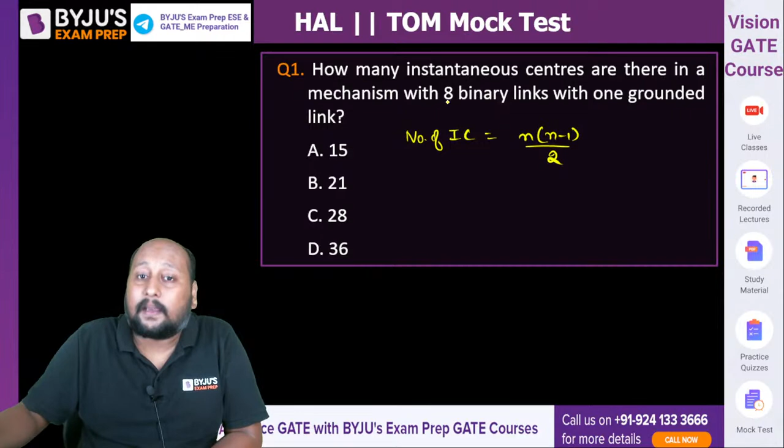But let us suppose, they are saying that in a mechanism there are 8 binary links with one grounded. So total number of links is 9. We have 8 binary links and 1 additional grounded link. So total number of links is 9. So it will be 9 into 8 by 2, that is 36. Option D is the correct answer. Read the statement carefully. Question को ध्यान से पढ़िए. If you commit a very small minor mistake, the wrong option will be there. और ये होता है in any PSU examination because time is very crucial. Less time पे you have to cover a lot of questions. Okay. चलिए. Can we proceed to the next one?

Question number 2 on the screen. A footstep bearing and a rotor of a vertical turbine form an example of incompletely constrained motion, partially constrained motion, completely constrained motion, or successfully constrained motion. What do you feel will be the correct answer? A, B, C or D? Footstep bearing, remember, if you have studied relative motion in theory of machines, we discussed this concept. In a footstep bearing or rotor, what is the type of constrained motion? Incompletely, partially, completely or successfully constrained? We are getting some responses. It's quite easy. Very good.

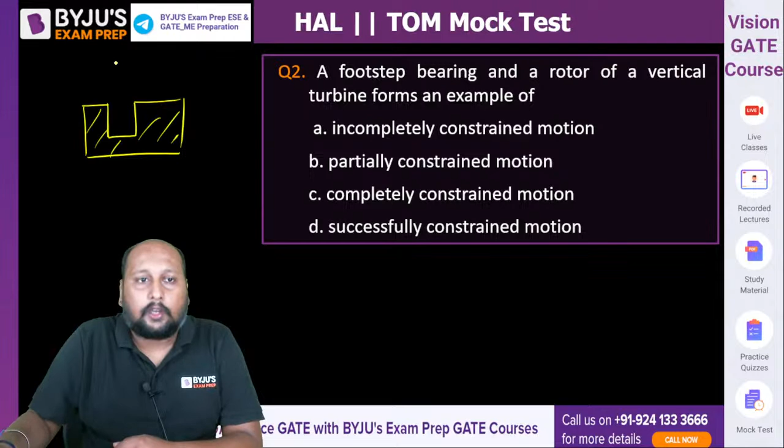If this is your footstep bearing, and if I'm only placing a shaft, it can have a rotational as well as a translatory motion, right? But due to the application of force, when a force F is applied on this shaft, it will restrict this. We only have rotational motion, and that is successfully constrained motion. Option D is the correct answer. Footstep bearing is an example of successfully constrained motion. Clear? Very good, perfect. Next question on the screen.

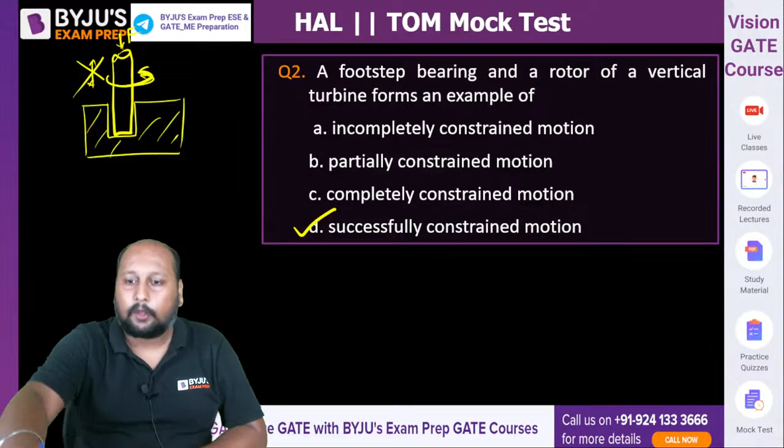ये लीजिए. Which of the following statements is appropriate for a governor of an engine whose speed continuously fluctuates above and below the mean speed? A very easy question. Which of the following statements is appropriate for the governor of an engine whose speed continuously fluctuates above and below the mean speed? What do we call this type of condition?

CGBM का एग्जाम कैंसिल हो गया क्या? ये वो देखना पड़ेगा यार. I don't think so. Notification तो अच्छा, good number of vacancies were there. Okay, let me see. इस सेशन के बाद आप मेरे को ना कांटेक्ट कीजिए. Let me have a look on this.

Stable, hunting, isochronous or unstable? Arey, very easy question, guys. I want a correct answer. What is the situation, like if you're having a condition that the governor of the engine, in which the speed continuously fluctuates up and down the mean speed, what is this condition called? Isochronous, hunting, stable or unstable?

Yes, anyone else? Rohit, Kiran, Pravalika, A, B, C or D? They both are saying option C. Is it correct or not? Arey yaar, it's a very easy one. Exactly, Pravalika is absolutely correct. But this condition is called hunting. Okay. This particular condition we call it as hunting of a governor.

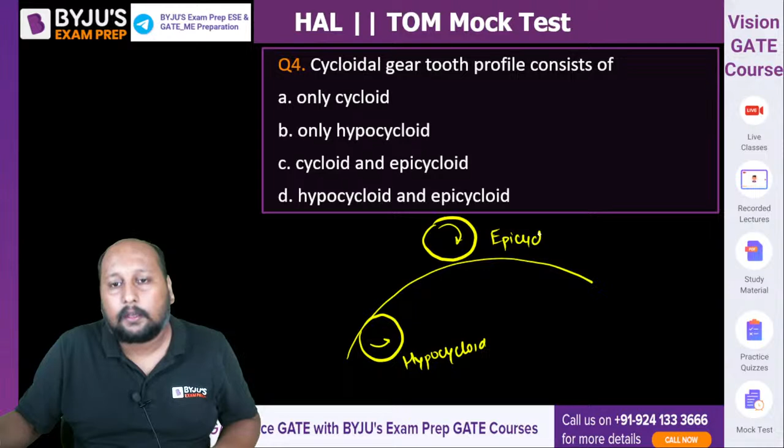Okay, and when the circle is rolling without slip over the curve, we are getting epicycloid. Okay, fine. And to make a cycloidal gear teeth, we are using both the profiles, and that is the reason cycloidal gear teeth are expensive. These are expensive gears. These are some small points; from a single question, we'll be trying to revise the entire syllabus.

Okay, acha. Interference is occurring in which gears? Involute or cycloidal? Yes, it is occurring in involute. In cycloidal, interference is not happening. That is the reason whenever we are working where no interference is required, we are implementing the cycloidal gear teeth. But because of this costliness, we are limited to limited applications. We are using the cycloidal gear where cost is not the criteria, right?

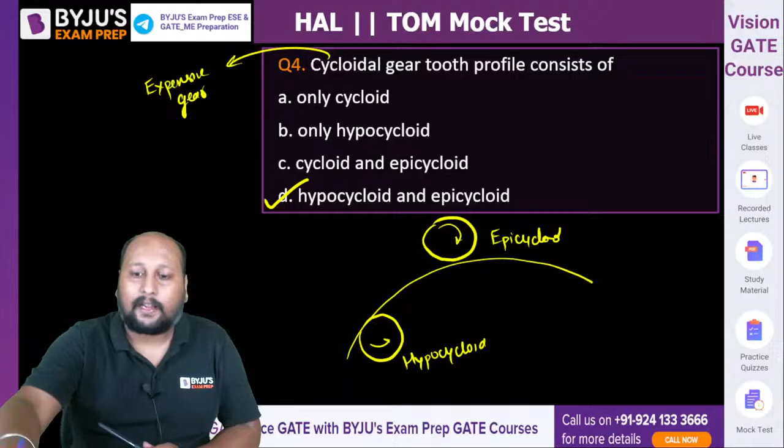Which of the following is the correct statement regarding flywheel? A, a flywheel influences the mean speed of the prime mover. B, the flywheel influences the variation of load demand of the prime mover. C, a flywheel influences the cyclic variation of the turning moment, and D, the flywheel influences the mean torque developed by the prime mover. Let us see who's going to give me the answer.

Let's see the first 4 students who are going to give me the answer. A, B, C or D. Correct answer, not the incorrect. Okay. Shreyash, yes. Quickly. Rohit, Pravalika, Kiran. Read the statement carefully, there could be slight confusion, but if you read the options carefully, there is only one option correct. Which states the correct explanation about the flywheel? Gaurav is saying option C.

Very good. Whenever you are solving any question from flywheel, we are getting a fluctuation of turning moment. We are having the T theta diagram, this fluctuation of torque, and in order to nullify that, we are getting a mean torque by using this flywheel, right? Now, a flywheel influences the mean speed of the prime mover? Not at all. Variation of the load demand? No. Option B is for governor, not for flywheel.

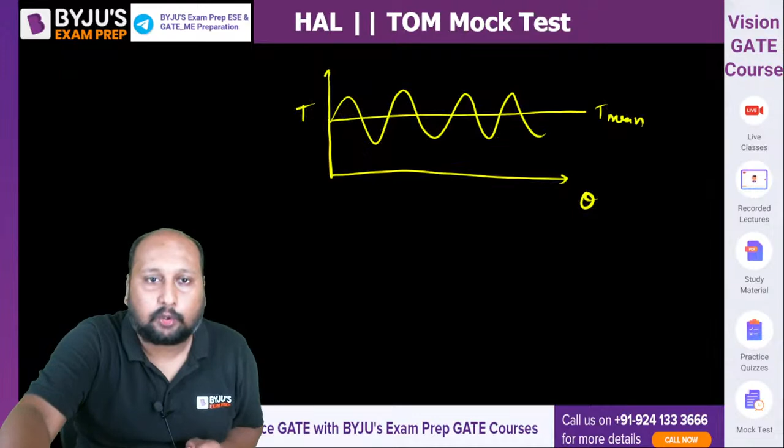What type of progression will be followed by the amplitude of free oscillation with Coulomb's damping? Harmonic, arithmetic, logarithmic, exponential. Tell me, in Coulomb's damping, do we have any vibration? If yes, then there is only one answer. If there is no vibration, then we have to go for either B, C or D.

Wherever there is vibration present in the system, we will always have harmonic motion. Wherever there is damping, under damped system, there is a harmonic system, right? So option A, simple harmonic motion. In Coulomb's damping you have an under damped system, zeta is less than 1. This is the type of oscillation occurring, something like this.

This is an example of an under damped system. We are having a simple harmonic motion. About the mean value, the amplitude is changing. Option A. Very good. Acha, tell me if this would have been over damped or critically damped, what would be the answer? If this would have been over damped or critically damped, then your answer would be logarithmic.

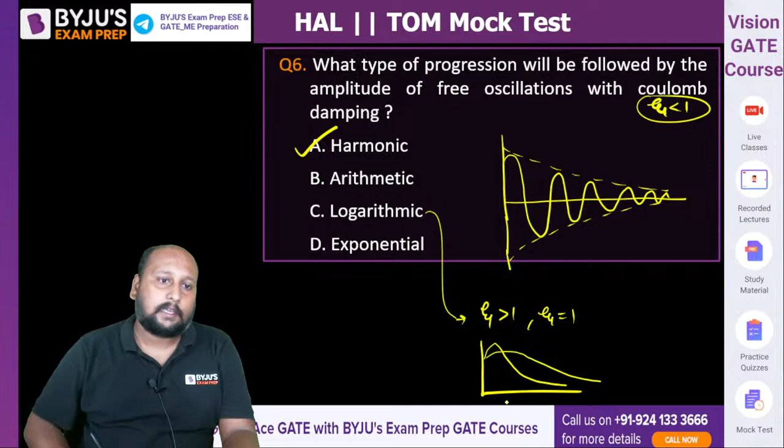Remember, if you talk about the over damped and critically damped, here the graph is something like this. Hai na? This is your quick response. This is your critically damped. This is your over damped. Logarithmic decrease of the amplitude. There is no fluctuation happening. Exactly. Very good. Correct answer. Option A is correct.

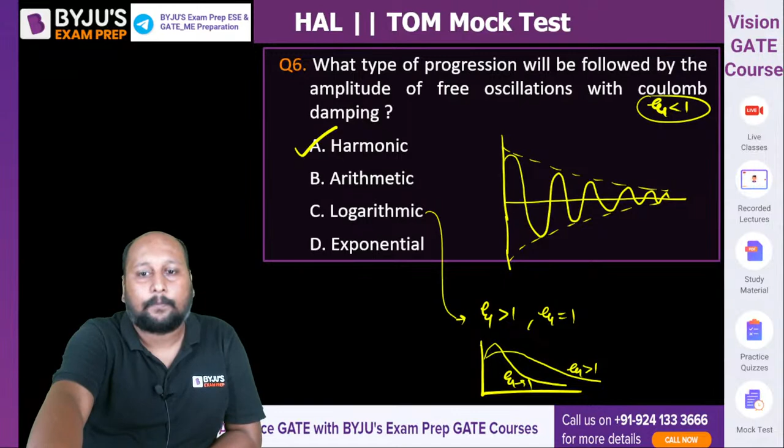Okay. Next question. Question number 7. What causes the variation in the tractive effort of the engine? Very easy. Unbalanced portion of primary force along the line of stroke, unbalanced primary force perpendicular to line of stroke, secondary force, or both primary and secondary unbalanced force. What is the prime reason for variation of the tractive force in an engine?

Arey yaar dekho, don't give me the wrong answers, because this is in your paid classes. I think it's not being run, but at least I have taught you last year this topic of balancing. If it is not clear, I'll definitely take the same segment again on YouTube, but I want you to have complete clarity.

Very good, Manthan, absolutely correct. It is because of the primary unbalanced force. Let's keep aside this question. First of all, tell me what are the effects of partial balancing of primary unbalanced force. There are three effects. One is the variation of the tractive force. Second is the variation in swaying couple. And third one is your hammer blow. Yaad aa gaya?

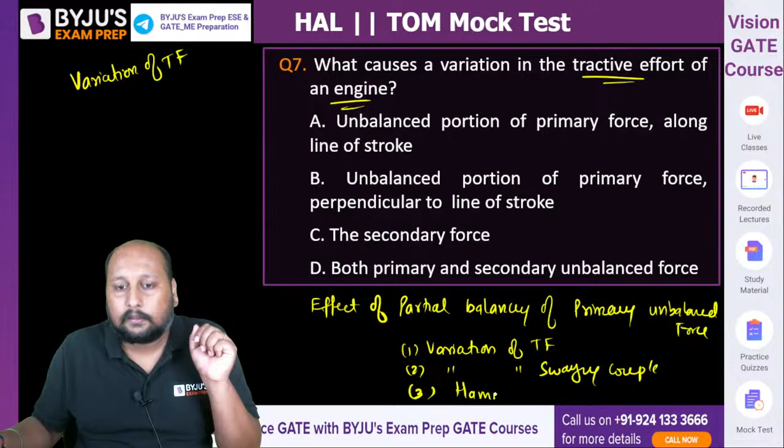Acha, tell me one thing. Variation of the tractive force and variation of the swaying couple is due to primary unbalanced force along the line of stroke or perpendicular to line of stroke? It is because of the unbalanced force along the line of stroke. But hammer blow is due to the primary unbalanced force perpendicular to line of stroke. So option A is correct. Option B is for hammer blow.

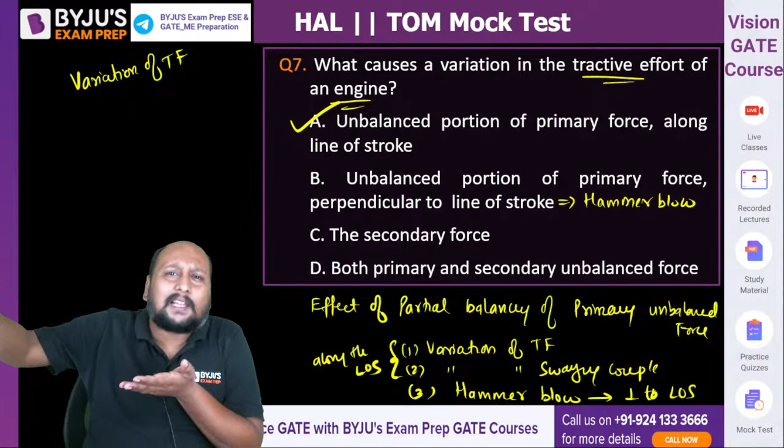And we are never bothered about the secondary unbalanced force. Why? The reason being, it has a very less magnitude. The primary unbalanced force is much higher than the secondary unbalanced force, so we always concentrate on eliminating the primary rather than the secondary. If primary is eliminated, the majority of the problem is resolved. Now let's work on the secondary. Clear? Option A is the correct answer. Very good. Next question, question number 8.

Very easy, very important. The logarithmic decrement of a damped single degree of freedom system is delta. If the stiffness of the spring is doubled, K2 = 2K, and mass is halved, M2 = M/2, then what is the new logarithmic decrement? Delta by 4, delta by 2, delta, or 2 delta?

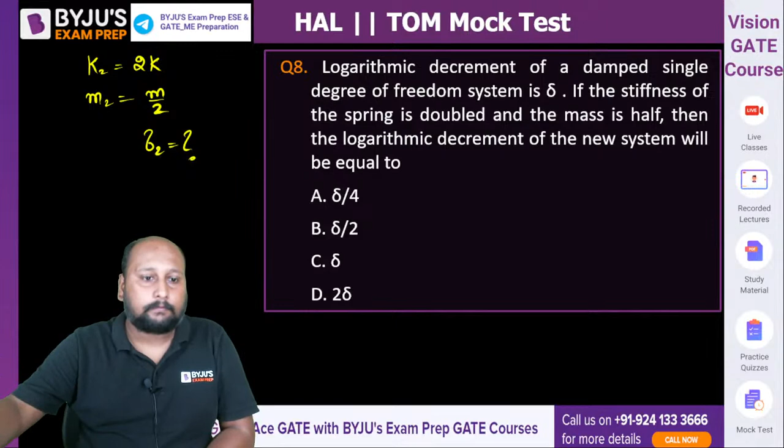Right. So do we have any formulation between the logarithmic decrement and the zeta value? We have a very easy one: delta = 2 pi zeta / √(1 − zeta²). So if I check what variation happens in zeta, I can say the logarithmic decrement variation. What is zeta? Zeta = C / (2√(KM)). Let us calculate zeta 2.

Zeta 2 = C, not changing, divided by 2√(2K × M/2). This is nothing but C / (2√(KM)), so the ratio is 1. If zeta is not changing, will delta change? No. So delta 2 = delta 1, that is option C. Is this clear? Understood?

Because logarithmic decrement depends on only one parameter, that is the damping ratio. And damping ratio we know the formulation: C divided by 2 root of k into m. So by that formulation we are checking, and the zeta value is not changing. If zeta value is not changing, we can directly say the value of delta is also not changing.

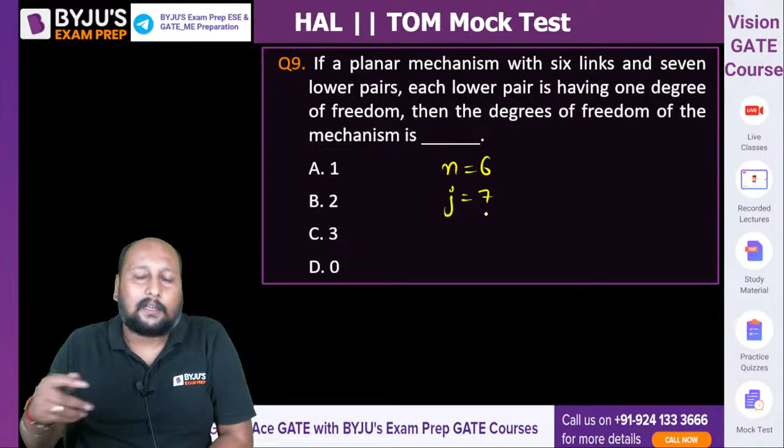If a planar mechanism with 6 links and 7 lower pairs, each lower pair having 1 degree of freedom, then what is the degree of freedom of this mechanism? It has 6 links and 7 lower pairs, right? Lower pair means each has a single degree of freedom. What is the value of F? There is no higher pair.

Simple straightforward question. F is equal to 3(n minus 1) minus 2j minus h. So 3 into 5 minus 2 into 7, that is 15 minus 14, that is 1. This is option A. So this is an example of what? This is an example of a kinematic chain.

Yes or no? If one of the links is fixed in the kinematic chain, that is called a mechanism. Clear? All right. Can we go to the next question? Next question, number 10 on the screen. Almost we are coming to halfway.

For a planar 4-bar mechanism, the lengths of the links are as follows: AB is equal to 90, BC equal to 40, CD is equal to 50, and AD is equal to 70. You have to tell me which link needs to be fixed in order to get a crank-crank mechanism, that means a double crank mechanism. Quickly, which link needs to be fixed to get a double crank mechanism?

Can we go through the 1 degree of freedom in the question? Sometimes they are tricking with the statements. For a 2D planar linkage, if you say it is a mechanism, by default it has a single degree of freedom, right? But they are saying this 1 degree of freedom is of each of the lower pairs, the DOF of individual lower pairs. Okay, chalo, next.

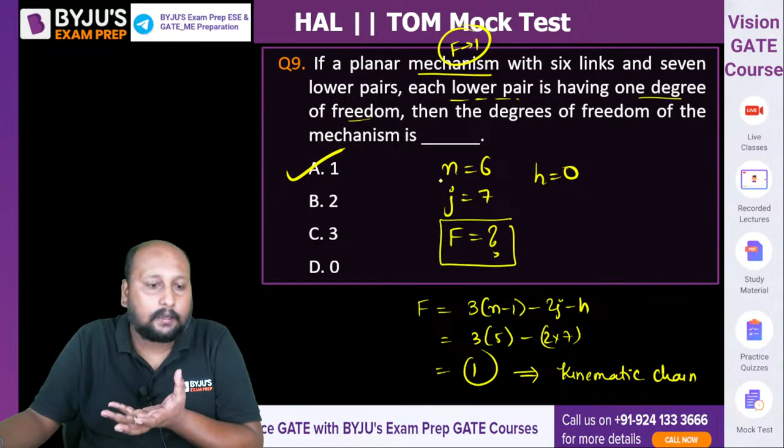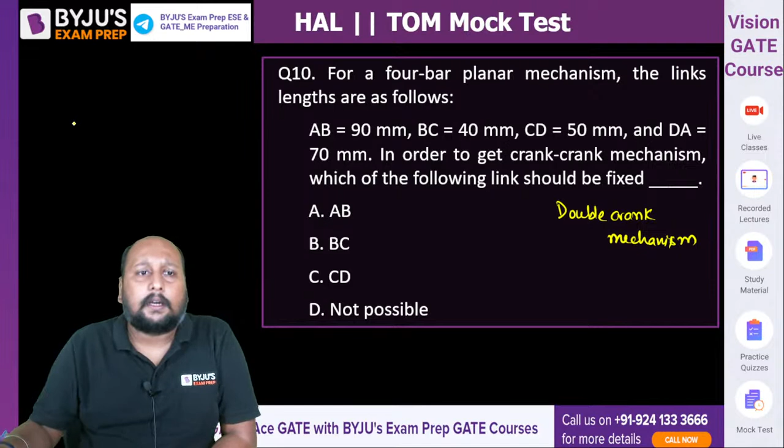A very easy question. Manthan is saying option B. Anyone else? You have to go for double crank mechanism. Very easy question, guys. Let me draw the diagram. This is A, B, C, D. AB is equal to 90, BC is equal to 40, CD is equal to 50 and AD is equal to 70. All of you are going with option B. Can we lock option B, everyone? 100% correct or not?

Tell me one thing. Is the Grashof law satisfied or not? Which is the shortest link? This is the shortest link. Which is the longest link? This is the longest link. The shortest plus longest is equal to 90 plus 40, that is 130, right?

Good evening Jay, good evening.

And the length of the other two, P plus Q, is 50 plus 70, that is 120. Is the Grashof law satisfied? No, it is not satisfied. If the Grashof law is not satisfied and you fix any link, even the shortest link, you always land up with only one mechanism, that is the double rocker mechanism. S plus L is greater than P plus Q, so Grashof is not satisfied. If Grashof law is not satisfied, you fix any link, you always get what?

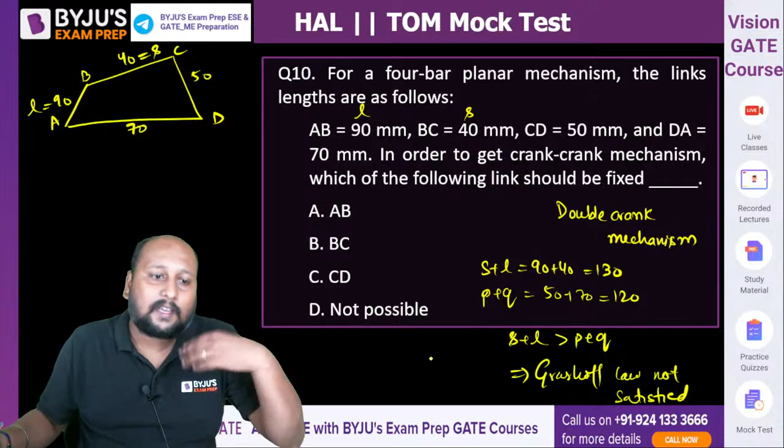Double rocker mechanism. Option D is the correct answer. Option D, very good, Jay, very good.

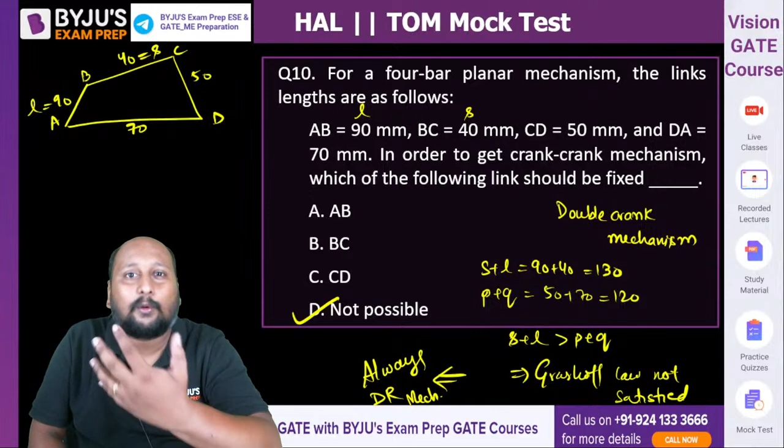I hope so. In the lines, many of the students are giving me the wrong answer. I hope you are realizing the mistake. Realization of the mistake is more important rather than giving the correct answer in the session. Giving the correct answer is definitely a good point, but if you are giving some wrong answer, you have to learn from that. All good? Chalo, next question.

Question 11. Piston reciprocating inside a cylinder is an example of completely constrained, incompletely constrained, successfully constrained motion. Okay, very easy. So we are having, this is the piston, this is the connecting rod, this is the crank, right? So we are having this to be fixed.

Now let us suppose agar ye connecting rod was not present, then piston could have a rotational as well as a translatory motion. If there is no connecting rod attached, the piston can have both motions, translatory as well as rotational, but because of the inclusion of this connecting rod, the rotation part is eliminated. So now it is restricted to reciprocate, it cannot rotate. So this is an example of a successfully constrained motion.

Only option C, only option 3 is the correct answer. Clear? Only option C is the correct answer. Is this clear or not? Yes or no? Yes, मजा आ रहा है? All good? Enjoying the session?

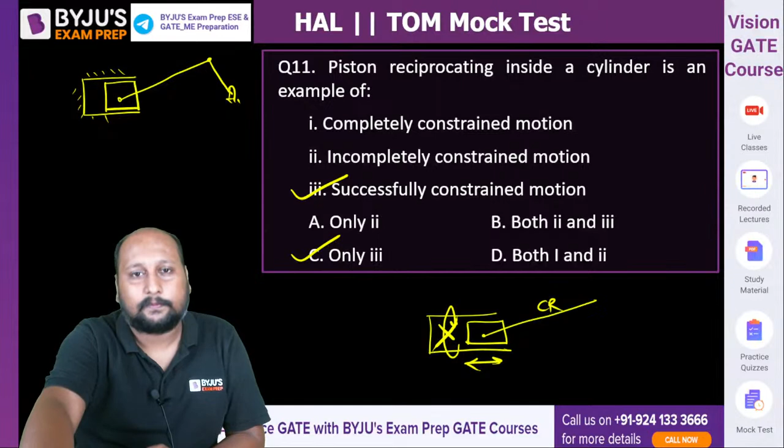In an Oldham's coupling, the maximum velocity of sliding is given as 0.25 meter per second. The driving shaft revolves at 180 rpm. What is the distance between the two parallel shafts? A simple question from Oldham's coupling, double slider mechanism. अच्छा बताइए how you are getting Oldham's coupling? In double slider, which link needs to be fixed?

अरे बहुत easy question. To get Oldham's coupling, which of the links should be fixed? Connecting link, slider, या slotted plate. We are having 2 sliders, 1 slotted plate and 1 connecting link. So Oldham coupling we are getting by fixing the connecting link. Yes, right? Okay, now come back to the question.

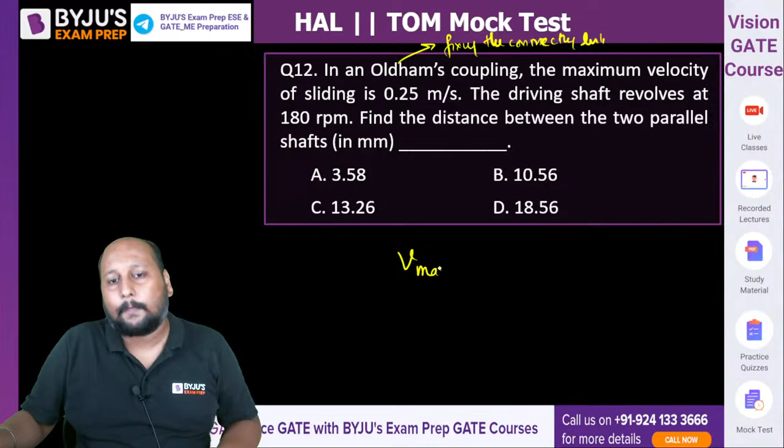They are asking what is the distance between the shafts. So we know that V maximum is equal to the distance between the shafts into omega. Perfect. Very good. अरे लिखने के बाद क्यों बोलते हो? Try to respond before I'm writing the answer. I think there is a delay. Is there any delay, that I am asking the question and you are responding after some time?

Sir, is there any negative marking? Yes, majority of the papers में होता है. Last year it was not there, but this year they have stated that it will be having negative marking. ISRO में तो है भाई, है ना?

So here, this is the distance, let us say r, this is omega, that is V max. V max is 0.25, omega is 2 pi into n by 60, so r is 0.25 by 6 pi. This is in meter. You can say this is 250 by 6 pi mm. So if you divide, are we getting 13 point something? Are we getting 13.26? Very good, Manthan. Option C, 13.26.

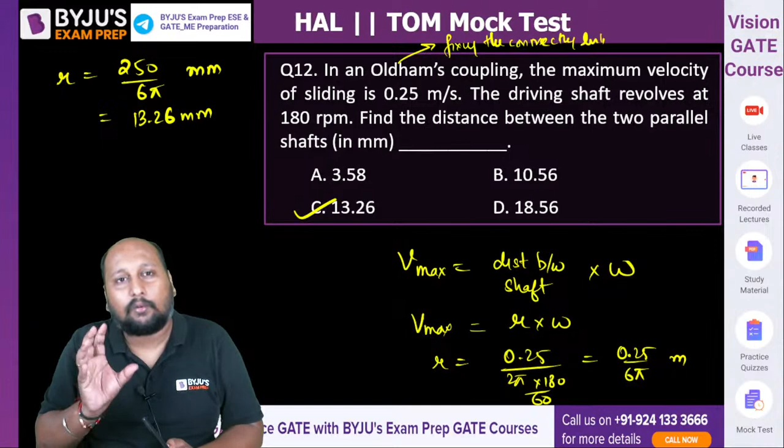You got 250 divided by 6, so 41 divided by 3, approximately 13 point something. देखो, without calculator you have to do the calculation. Do not use calculator, please. In PSU this has to be, because we are so habituated to using calculators for small calculations. Even if you are preparing for GATE, whenever there are small calculations, do not use calculators. Chalo, option C is correct answer. Let's go for the next one.

Question number 13. In case of 4 link mechanism AB, BC, CD and AD, if CD is fixed, which mechanism are we getting? Check the Grashof law, because in the majority of examinations they will trick you. They will fix the shortest link and ask whether we are getting double rocker, crank rocker or double crank. So please check whether the Grashof law is satisfied. Then only we can go for that.

Okay, then perfect. I think in ISRO there was no. ISRO में तो है. ISRO में तो है. HAL में it's not there. तो ठीक है, अच्छी बात है यार.

ISRO में there is a negative marking. Okay, and that simply means you do not have to leave a single question unmarked. है ना? That simply stated, it is directly indicating one thing: 100% attempt should be there. At the end, try to fill up all the options we are having, because you never know, you can get some 1 or 2 bonus question.

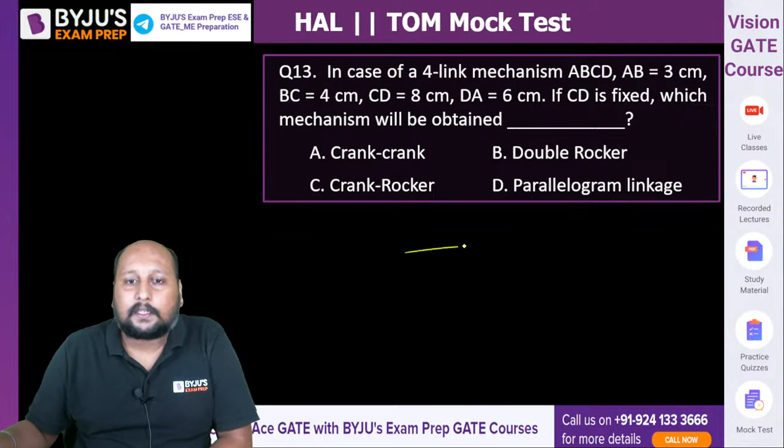है ना Jay? Okay, A, B, C or D. Jay is saying B, Manthan is saying A. अरे भाई, okay, let's see what is the A, B, C or D. AB is 3, BC is 4, CD is 8 and AD is 6. We are fixing CD. Okay, so this is shortest.

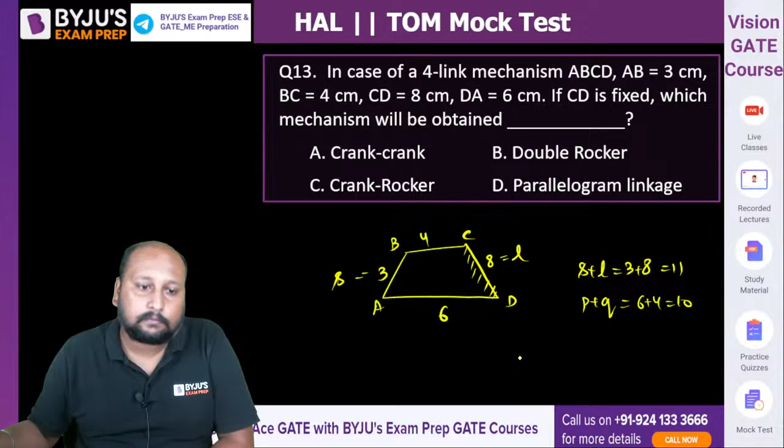This is longest. So S plus L is equal to 3 plus 8, that is 11. P plus Q, that is equal to 6 plus 4, that is 10. Again, the Grashof law is not satisfied. Grashof not satisfied, you should be very happy. Whenever you are getting Grashof law not satisfied, you should be very happy, because you will be getting double rocker.

देखो, last year there was no negative, but this year हुआ है, तो definitely you can expect easy question, right? And definitely the cutoff will be slightly on the lower side. हो सकता है lower हो, है ना? You never know, because it depends upon the performance. It's a relative performance. If majority are performing very well, automatically that cutoff will be increasing, right? Okay, very good. Option B is the correct answer.

Question number 14. Okay, this is an easy question. The instantaneous center of sphere undergoing pure rolling on a curved surface lies at infinity, at the center of the sphere, at the center of the curved surface, at the point of contact of the sphere and the surface. Okay, so we are having a curved surface over which a sphere is rolling. Where will the I-center be located?

इससे easy question you cannot expect in the examination. इससे ज़्यादा easy question you cannot expect. And I want everyone to be responding correctly, right? Okay, J and Negi are saying option D. What about the other students? इससे easy question नहीं आ सकता guys. Perfect, option D is the correct answer.

Whenever you are having a pure rolling condition, right? Rolling जब भी देखो, try to understand the I-center is always at the point of contact. Wherever we are having the concept of rolling, even if you are rolling on a curved surface or a straight line, your I-center will be located at the point of contact. But this is not happening with sliding. Let us suppose you are having sliding. Where will the I-center be located?